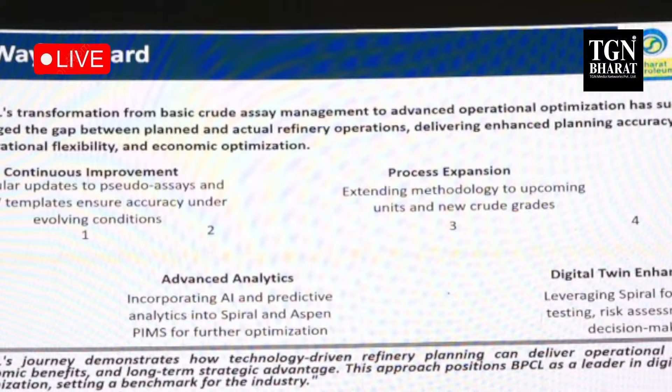Thank you, Shekhar. What a fine example of leveraging existing software tools which are available for modeling very complex real-time scenarios which we come across, and also for procurement efficiency by analyzing number of crudes very fast. So we are continuously challenged by these kind of scenarios, and it's a great example of how these things have been used. So thanks for that presentation.

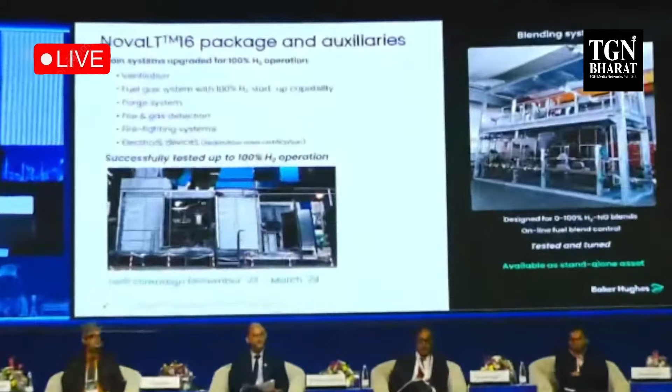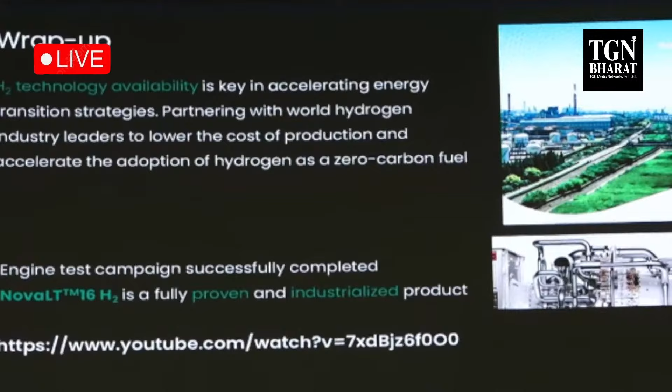So to wrap up on the Nova LT16, we know that hydrogen—we know how to burn hydrogen, or let's say we have the available technology to burn it. We are working with world leaders to produce this hydrogen at a lower cost and make it more friendly for the customers, even in terms of cost. And at the end, to achieve a zero carbon mission for the different customers, whether it is refining or petrochemicals.

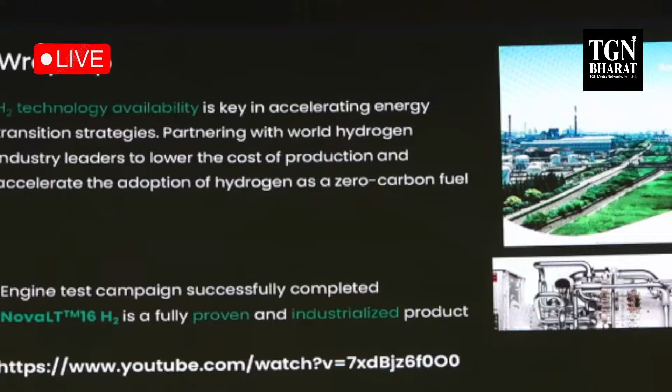We do have a short video. I don't know if we can play it, but I will quickly go through it.

We started the discussion with Nova LT16, and we do have another machine which is a heavy-duty gas turbine, able to produce up to 26.9 megawatts electrical. That's called Frame 5, and we have the solution operating up to 85% volume of hydrogen.

And in fact, we have a customer interest coming from Italy again to upgrade their existing gas turbine to run 100% hydrogen for Frame 5.

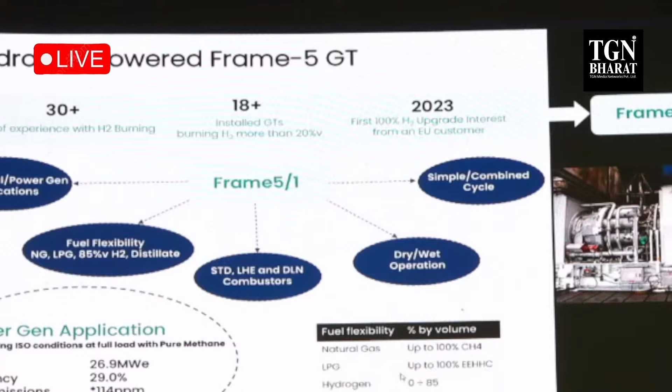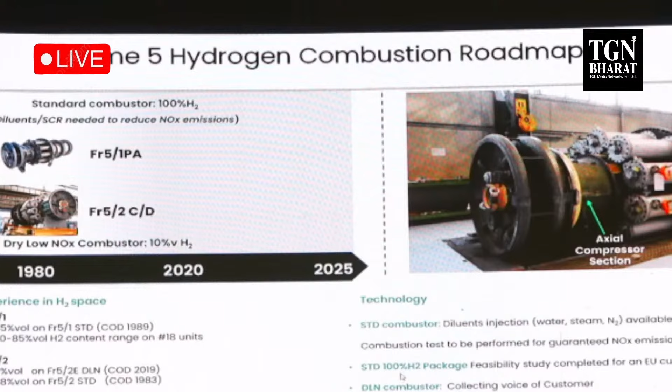These are the development phases. Back then, in 1980, we had the technology. We have been upgrading it for different applications and to burn more and more hydrogen. Now we are at a level of 85% volume of hydrogen. Similar challenges as we have seen for the Nova LT16 are applicable here, and also the different applications we see for these kinds of frames.

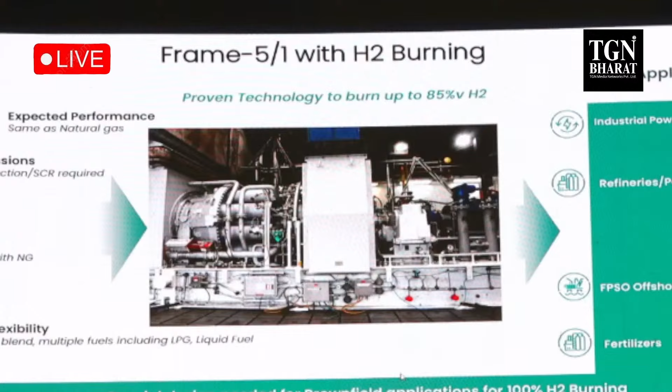At the end, we at Baker Hughes can help to achieve your decarbonization mission in the refineries or petrochemical industry. Please get in touch with us if you are interested in decarbonization of your plant. Thank you.

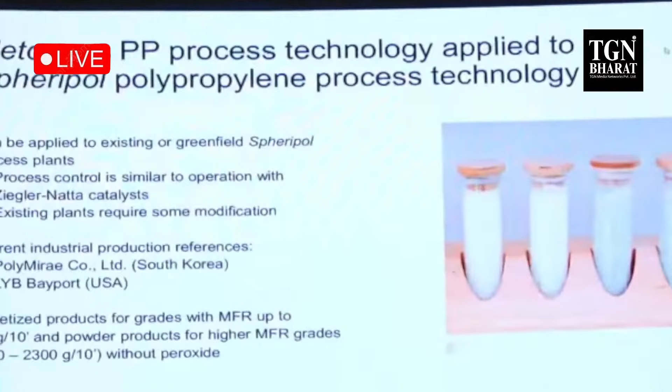Spheripol, I have already talked a lot about. The beauty of the Metocene catalyst is that, typically for melt-blown type grades, we can produce a product up to 2,300 MFR at the reactor. Normally industry produces those kinds of grades using peroxide, but the residual peroxide contaminates the polymer, and we lose that cleanliness of the product. By using this Metocene catalyst, we can produce up to 2,300 MFR, and the performance on your customer's line is perfect.

So then, if we are talking about textile lines like Reicofil 4, the performance of Metocene-based polypropylene product is fantastic.

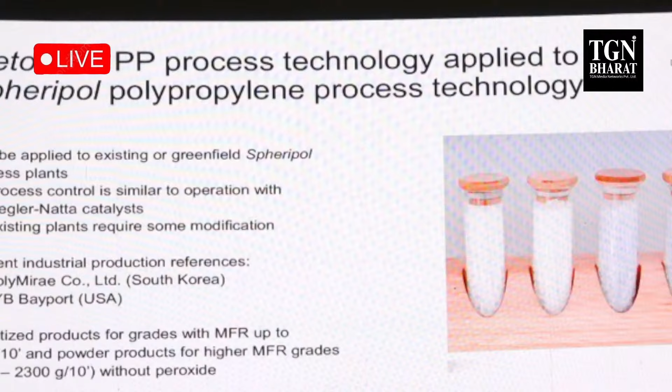This is the latest Spherizone PP technology, and in this technology we have a combination. Currently, industry is using only propylene and ethylene as comonomers, but here we can use multi-monomers. This gives the strength to this product that it can replace not only conventional PP, but also conventional other polymers.

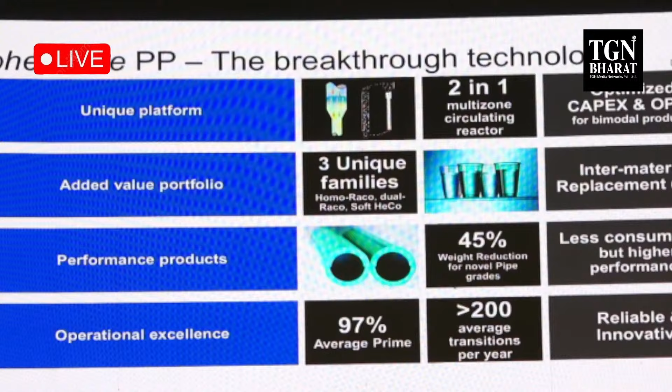So if we compare PP to PP, if a product is produced by any other technology, and we produce a similar product here, we can reduce the grammage of the polymer in the same application. Why are we able to do that? Because the process technology builds strength into the product in a way that it doesn't need as much polymer to give similar strength versus the existing polymer. The polymer is the same, but the beauty of the process technology is the kind of homogenization it brings.

If you see, there are two loops, one reactor, one loop. On one side, the riser side, one type of reaction is taking place, but on the downer side, another type of reaction is taking place. So it will look like one reactor to you, but with the switch of a button, this reactor gets divided into two reactors, and that is the beauty. That gives the process advantage to develop a product which performs better, and that's why we need a lower grammage of the product.

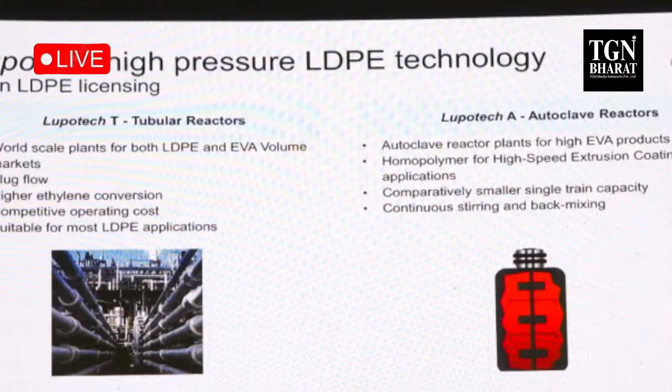The next one is for LDPE, and for LDPE we have both types of technologies, the autoclave one and the tubular technology. The third one is for Hostalen. We have a few plants in India, but the beauty comes from the 3-reactor ACP technology.

Normally, there are typical trade-offs in properties. If we increase density, then some other property like ESCR reduces. But in ACP technology, we can increase both types of properties together, and that is the advantage. So a grade like PE100 pipe grade, used for water transportation, can be produced using this ACP technology.

So with this, the key message is that we are continuously developing and bringing new technologies and new catalysts for polymerization, and I'm always available for your help. Thank you very much.

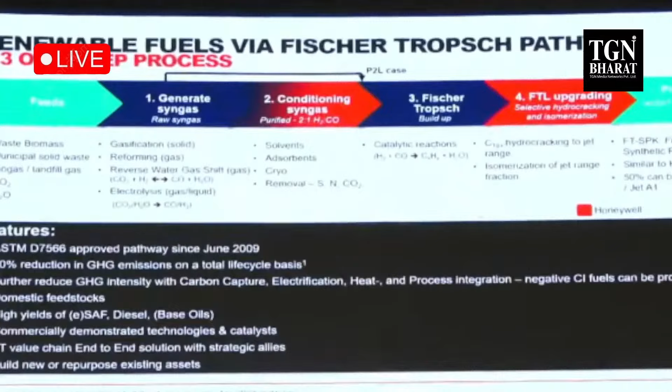Now I will take you a bit deeper into the Fischer-Tropsch pathway. This is how an overall complex of a Fischer-Tropsch pathway would look like. Be it any feed - waste biomass, municipal solid waste, biogas, landfill gas, or CO2 - the first and foremost step is to convert this into a synthesis gas. So generating syngas is the first step. Depending upon the feed we are processing, the quantity of contaminants in this syngas varies, and hence this needs further treatment to remove those contaminants.

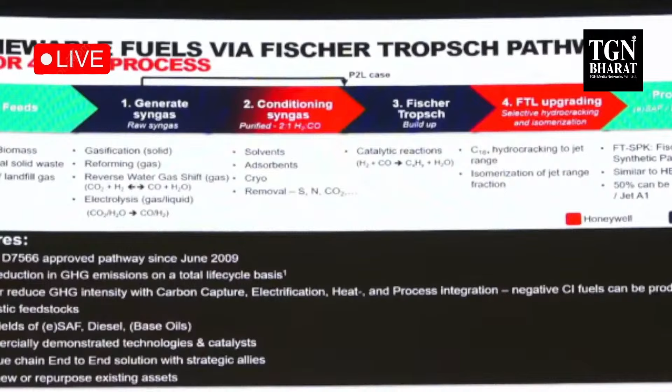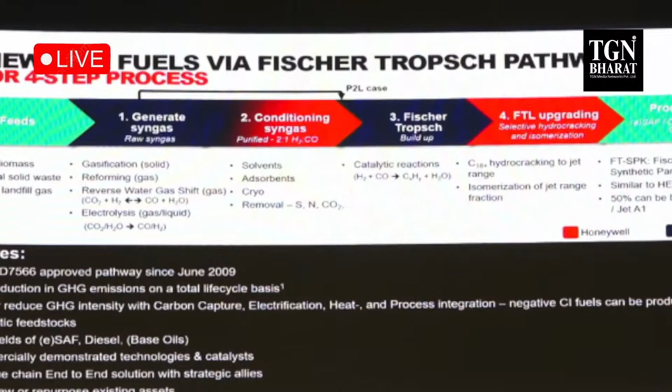Once the syngas is conditioned, we pass this through a Fischer-Tropsch building block, which converts this syngas material into a Fischer-Tropsch crude. Ultimately this FT crude has to be cracked back to put all the molecules in the right space, which is less than C18 range molecules, to meet the ultimate SAF product requirement. Another major advantage of this process is it gives flexibility either to operate the unit in SAF mode, or if there is a need, do diesel production, and if there is a need, we can also do base oil production.

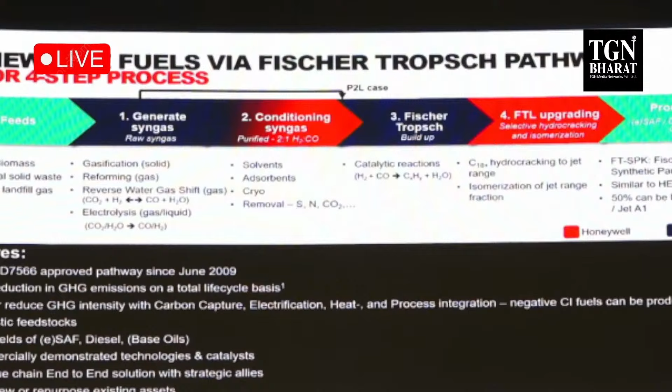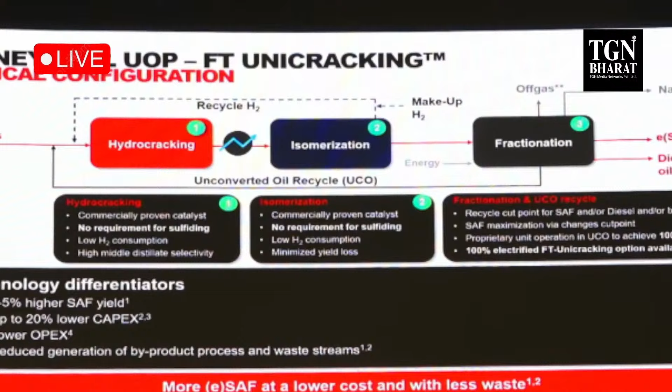So this is a very high level overview on the SAF pathway. From there, moving into UOP's particular offering - UOP has FT unicracking technology, which takes in feed from the Fischer-Tropsch process, which is nothing but the FT liquids and waxes. This material would need to be cracked, as I said, to less than C18 range material.

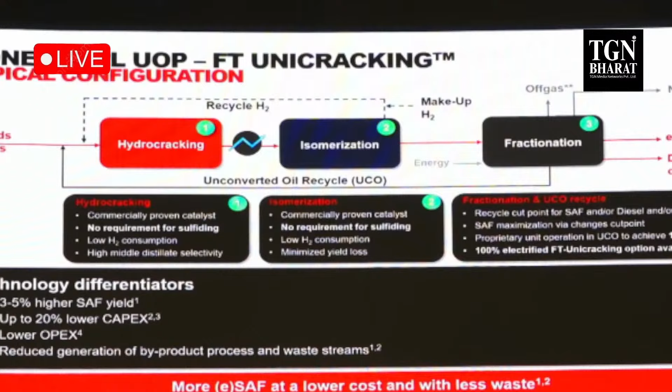The unfortunate problem, and which presents a bigger opportunity, is this: the FT material is highly paraffinic, and once we crack it, yes, it's very good material to meet the ATF range, but the problem is this will not meet the freeze point requirement. Hence we need to go for the isomerization step. So together with hydrocracking and isomerization, we would ultimately meet the SAF product specification as per ASTM D7566.

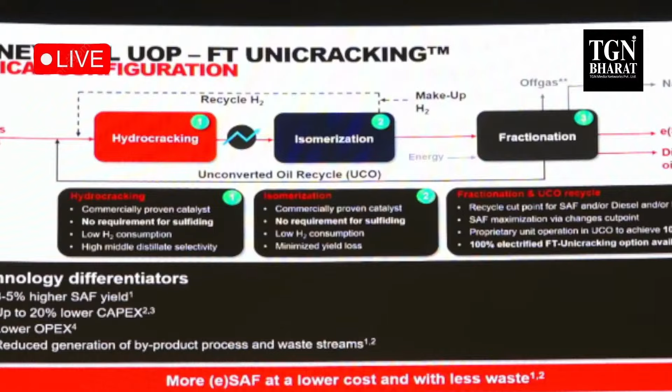Like any other cracking process, this would also generate byproducts - off gases and naphtha. If there is an offtake, well and good, so this can be sold in the market, but primarily we would aim to reduce this byproduct material. In the eventual scenario where we're left with some amount of this byproduct material, that is where we talk about carbon efficiency. The moment this naphtha and off gases are let out of the process, that much amount of carbon is lost, not in the form of SAF. So the carbon efficiency of the process is going to be less.

So during this scenario, we would try to integrate all this byproduct carbon material back through a recycle reforming and generate more syngas. Ultimately, if you look at a SAF complex, with all different feed materials that we start with, we will ultimately make just one product, which is SAF, going out of the unit. This means eventually my overall process carbon efficiency is going to be very high, in the order of 90 to 95%. So that is one of the biggest assets and advantages of this particular pathway.

Having talked about the technology itself, yes, everybody in this hall will know that these are technologies which have been in the chemical engineering domain for many, many years. However, the systems, the market, and the industry has progressed far ahead. These are not just paper technologies.

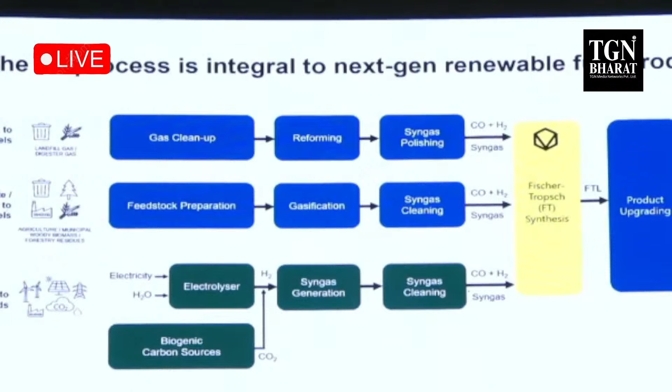I want to highlight where Fischer-Tropsch fits into the production of SAF. On this slide you can see three main pathways. At the top we have biogas to fuels: you take a sustainably generated biogas, for example landfill gas, which is cleaned up and reformed into synthesis gas, a combination of CO and H2, which needs to be conditioned to meet a roughly 2-to-1 ratio of hydrogen to CO for the Fischer-Tropsch synthesis path. The synthesis gas is then reformed into Fischer-Tropsch liquids, which are upgraded to SAF by cracking and isomerization.

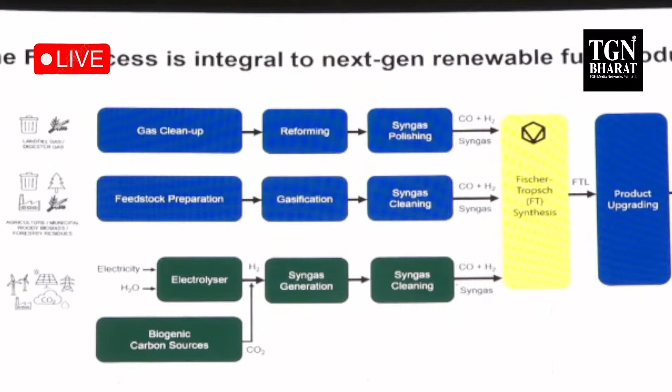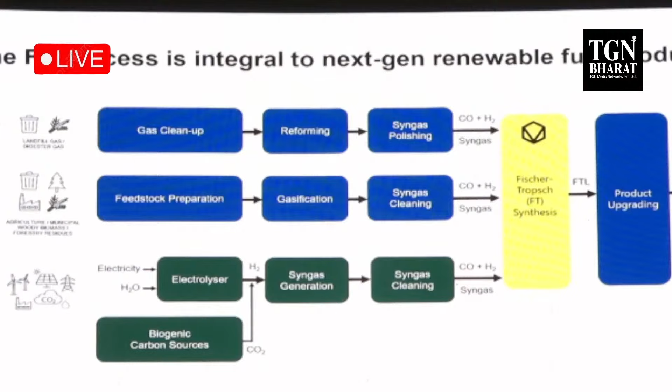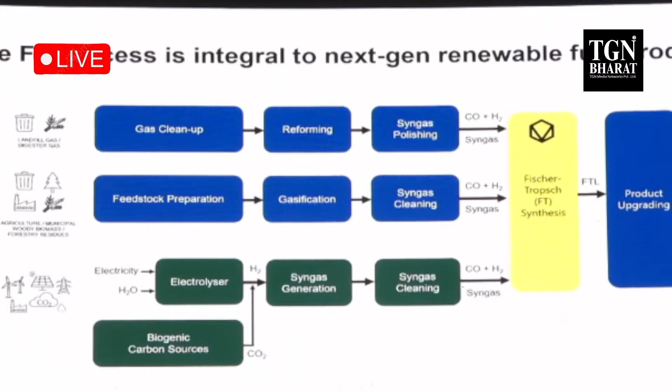Second, we have the solid waste pathway. Here you take solid waste, which is gasified at high temperatures to produce syngas. This requires some cleanup to get it on spec, such as removal of contaminants and adjustment of the hydrogen to CO ratio, leading into the same downstream processing through FT synthesis and product upgrading.

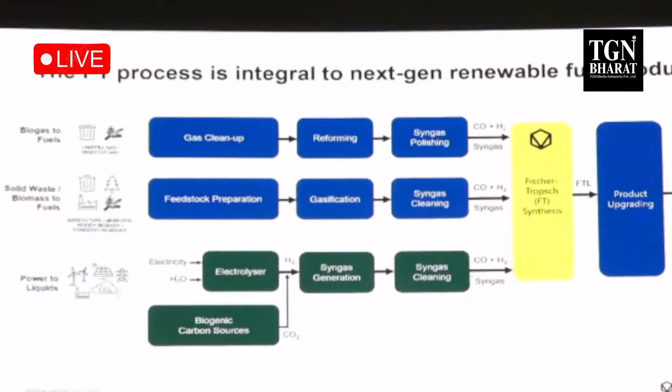Finally, you have PTL. PTL uses green electrons to produce hydrogen from the electrolysis of water. This is combined with CO formed from the conversion of CO2 from biogenic sources into CO, which is then generated into Fischer-Tropsch liquids through the Fischer-Tropsch synthesis process.

So another advantage of FT is that it's already a proven... sorry, my screen's updating here, but that one's not.

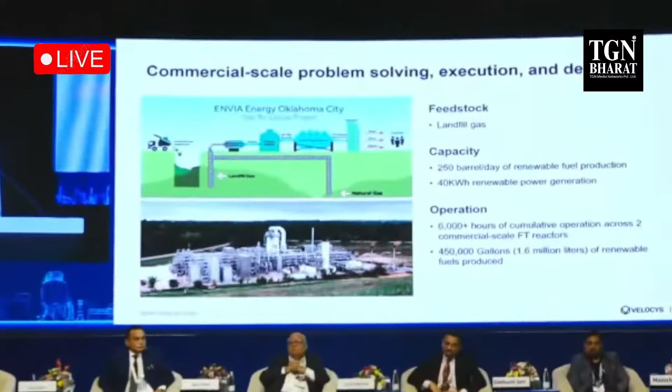And finally, we were able to demonstrate our technology on commercial scale at the ENVIA Energy Oklahoma plant, which was a landfill gas to fuels plant that utilized 2 of Velocys' commercial reactors, producing 250 barrels per day of renewable fuel production and 6,000+ hours of cumulative operation across 2 commercial scale reactors.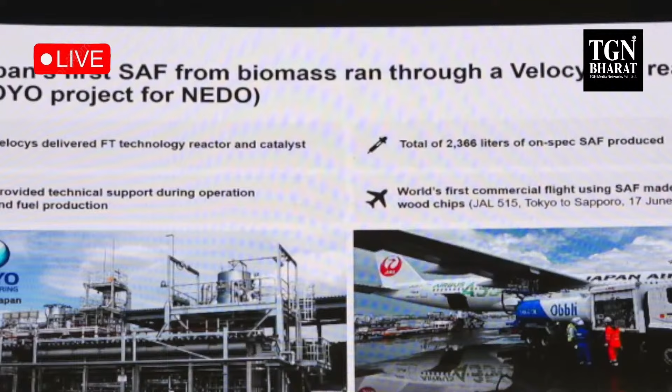We were also involved in a demonstration in coordination with Toyo and NEDO in Japan, in which our fuel generated from our unit formed part of the first commercial flight using SAF from wood chips in 2021 between Tokyo and Sapporo.

The microchannel reactor scales up using a proven strategy. From the lab through to the pilot and the commercial, we use the same dimensions. This means that the results gained during our lab testing and through the demos are very representative for the commercial scale, and it scales up in a linear and predictable fashion, reducing risk.

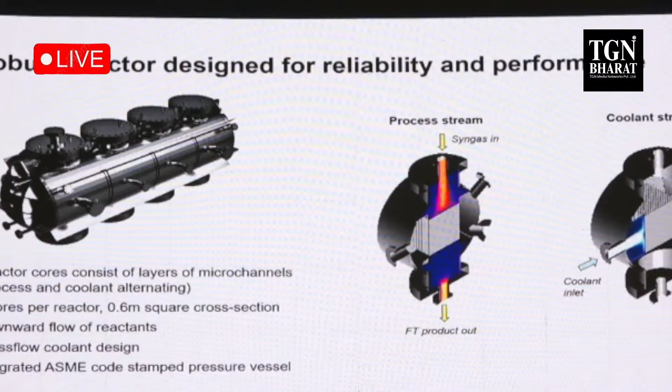What you can see here is our commercial size reactor. It's formed by 4 cores of alternating process and cooling channels. In the process channel, we have our catalyst packed in there where syngas flows down and FT liquids flow out the bottom. This is cooled by microchannels where boiler feed water is fed through and partially vaporized to remove the heat. This intimate design allows us to reduce hotspots and improve the selectivity and control of our reactor and manage the superactive catalyst.

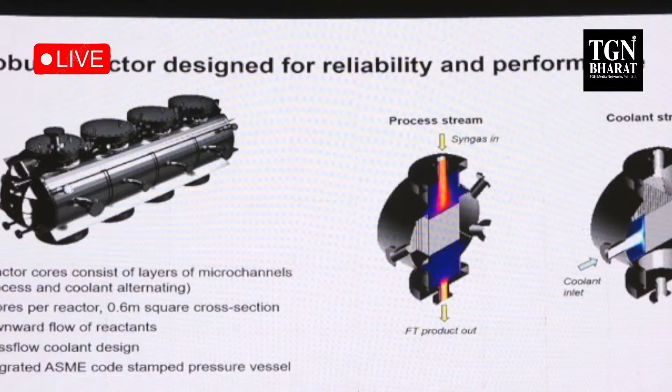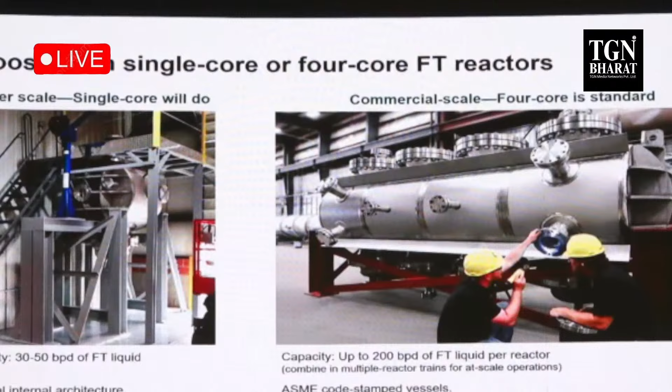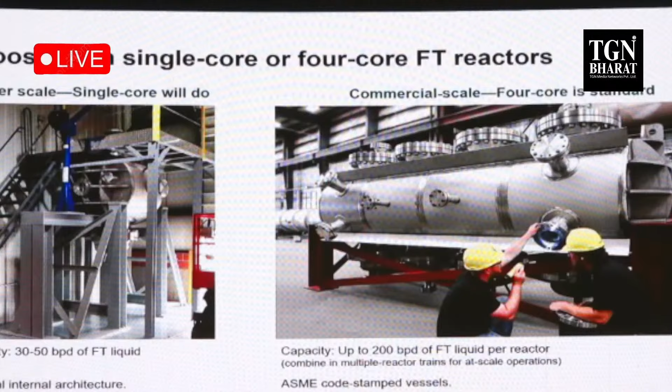Velocys offers a flexible solution. We have smaller single core reactors suitable for 30 to 50 barrels per day of FT liquid production, and then we have a larger 4-core commercial reactor for capacities up to 200 barrels per day. This is then combined together in trains to scale up and to scale down to any of our customers' needs for their desired projects.

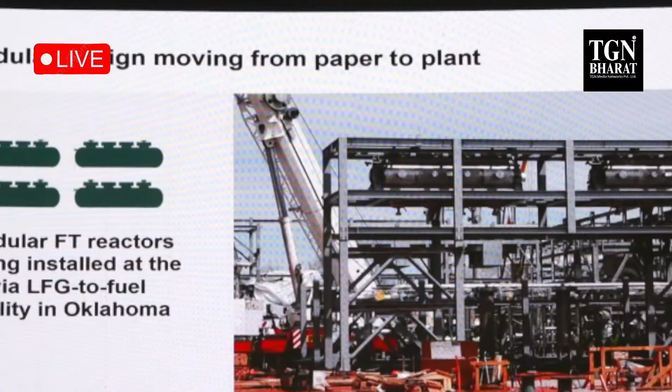Here we have our reactors being installed at the Envia location. As you can see, they're very small, very compact, easy to transport and easy to install. This enables us to deliver our reactors in a distributed manner where the source of syngas is, to provide FT liquids where it's needed.

Velocys' FT licensing model is taking off. Recently, we've announced our license being selected as preferred FT licenser for the Syzygy project in Uruguay, which is converting dairy-derived biogas into SAF via Syzygy's proprietary reforming technology. Additionally, we're partnering with NextChem and their advanced gasification process for the waste to fuels project in Immingham, Altalto in the UK.

We're also continuing our relationship with NEDO and Toyo to continue the advancement of SAF projects in Japan, and we have a strategic partnership with Sekisui, an advanced CO2 to CO technology to produce highly efficient power to liquids.

Post-HEFA, FT is your highest TRL commercially proven pathway to SAF, and Velocys is at the forefront of this. We've demonstrated our unit across the world with thousands of hours of commercial demonstration, piloted and lab testing. Velocys is ready today to help India meet its SAF demand through second generation technology licensing, FT reactor supply, and catalyst supply. Thank you.

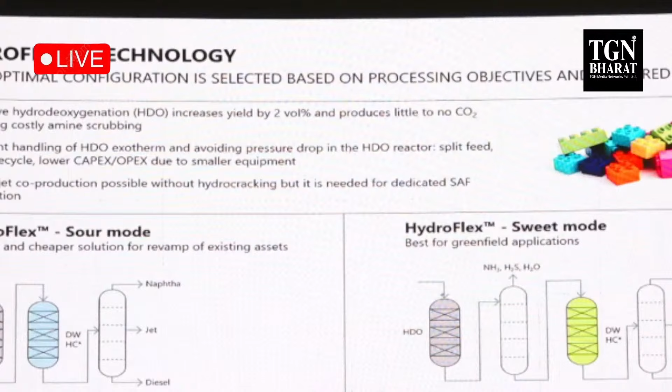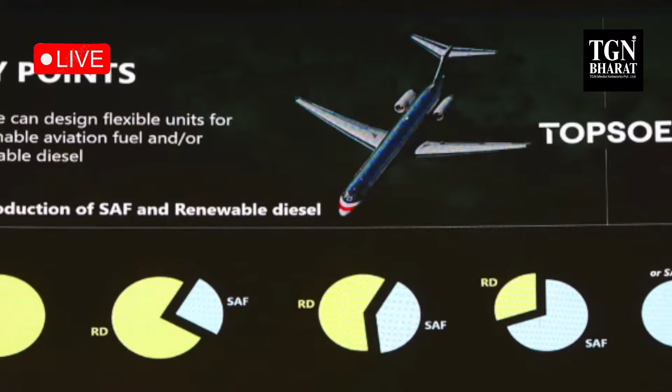The takeaway is with Topsoe technology, you have the full flexibility whether you want to go into 100% renewable diesel mode or 100% SAF mode, or anything in between. Topsoe has the solution for you.

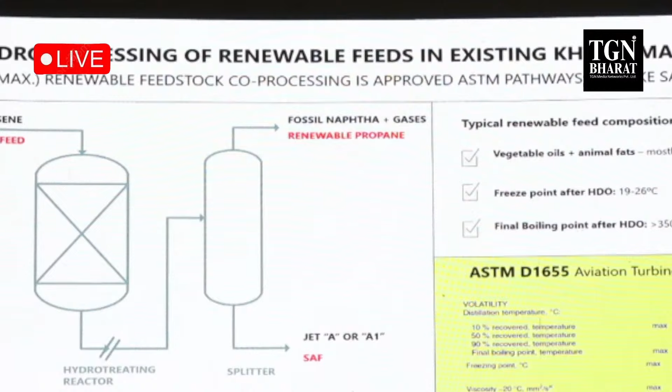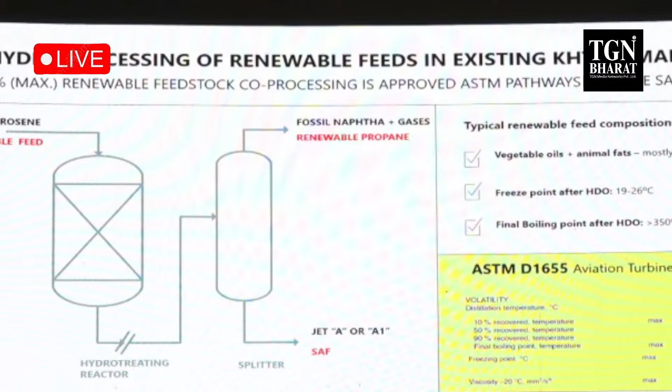A quick look into co-processing. So you want to use the existing fossil unit - we do have something known as co-processing. It's an ASTM certified method. 5 volume percent renewable feed can be used along with 95% fossil feed to get SAF. This is also certified under D1655, same as ATF.

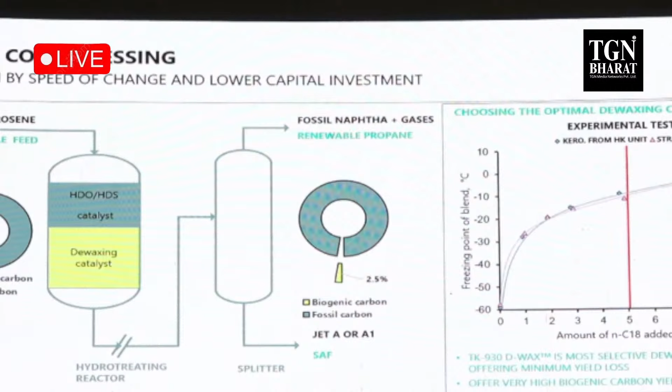What we try to do is a catalyst reload in the existing reactor. So the top has HDO, HDS catalyst, and the bottom has dewaxing catalyst. We are glad to inform that IOCL has shortlisted us for the co-processing method in its Panipat unit.

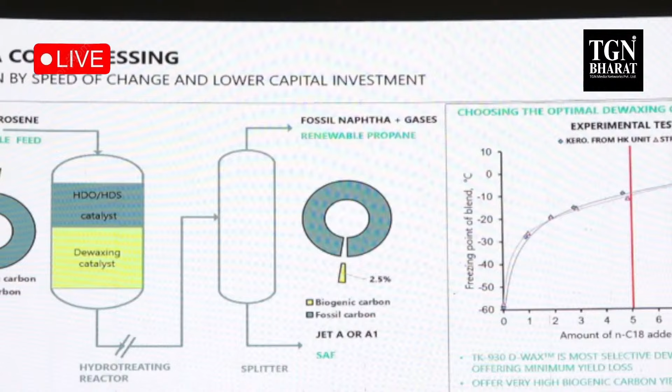I'll now invite Raju on stage to cover G2L.

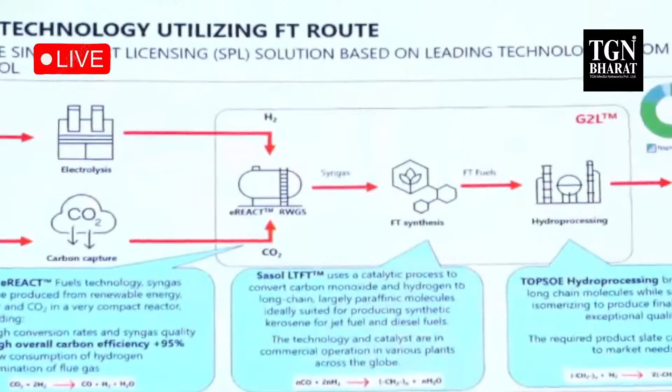And here we try to maximize the yield of SAF in terms of FT-wax. Then this FT-wax goes to the hydrocracking, which is a conventional hydrocracking. Here we crack the molecule and make SAF molecules, and we can get as high as 82% SAF by this process.

Going forward, I just want to highlight that it's very important that we utilize an innovative technology module to integrate this solution. In this particular slide, you can see the undesired products, which are gas, naphtha, and light ends. From the hydroprocessing unit, these can go back to the reverse water gas shift, or E-react, and then make more syngas. So this means we are fully utilizing this process, increasing the process efficiency.

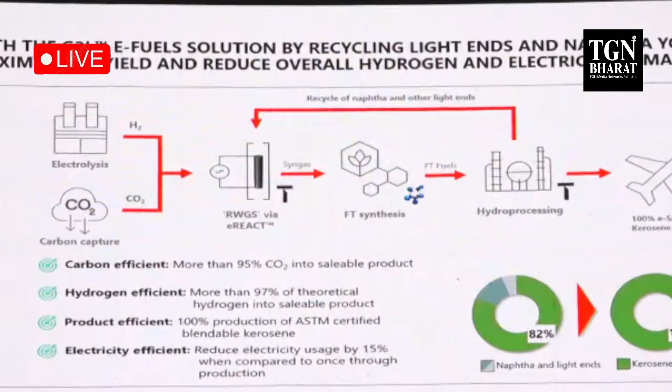And you can see this way we can increase the carbon efficiency by more than 95%, hydrogen efficiency so that we can use more than 97% of the theoretical hydrogen. Product efficiency - this product is ASTM certified. Electricity efficiency - electricity use is actually reduced by 15%. And you can see here the yield of SAF can be 100%. So I think that is a unique part.

Further going forward, I wish to mention that we have a SOEC, solid oxide electrolysis cell. This is Topsoe's high temperature electrolyzer, which is much more efficient compared to the alkaline and PEM electrolyzer. So if we integrate this particular block into the process, it can further enhance the efficiency of the system. On the right-hand side bottom, you can see the further electricity consumption reduced by 33%. So I think it's again reducing the levelized cost of hydrogen.

And I'm happy to announce that we are going to inaugurate this factory of SOEC by tomorrow, which is 500 megawatt capacity in Denmark.

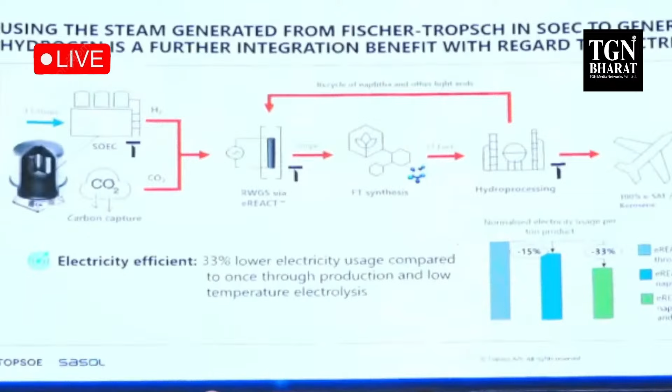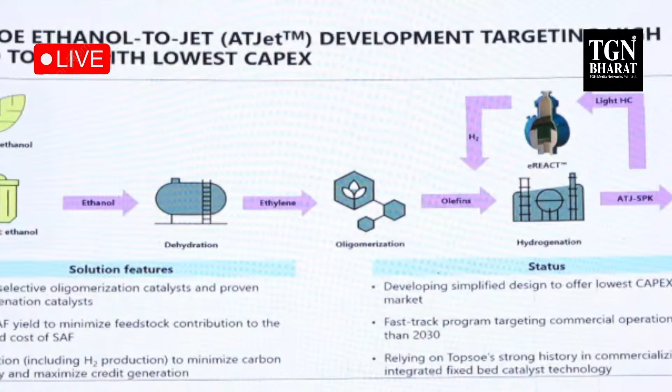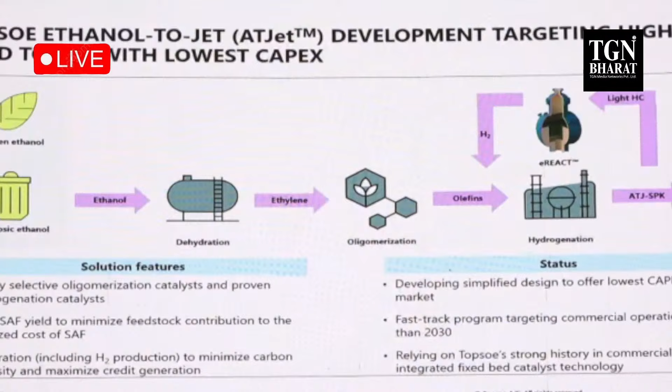Coming to the ATJ route, we are happy to announce that we are in an advanced stage of development. The goal of this particular process is to maximize the SAF, meaning more than 90% SAF from this process with minimum capex. In this process, we have dehydration, oligomerization, followed by hydrogenation. We bank upon our selective oligomerization catalyst and proven hydrogenation catalyst, and we try to maximize the SAF yield while reducing the cost of production of SAF. That is a key goal.

You can again see on the right-hand side that we are able to integrate e-react and make hydrogen, meaning you can recycle the undesired product to make hydrogen and make this process much more efficient. We are quite enthusiastic about it, and our plan is that by end of this year we are going to complete the process, and we may talk to the client. We are already talking to clients globally for this particular process.

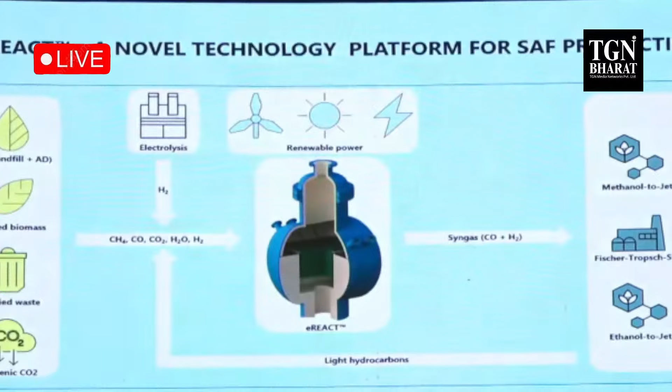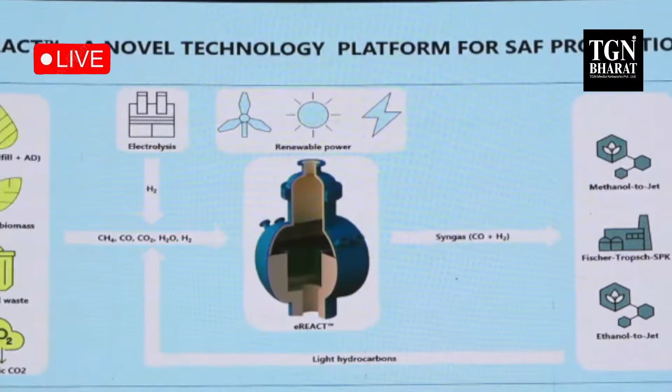A little bit about the e-react. I think this is a module - we call it a novel technology because it is an electrified reformer. It replaces the conventional reformer, and it can take methane, CO, CO2, hydrogen, and make syngas, which is sent to the Fischer-Tropsch process. Similarly, for ethanol to jet, we'll be using light hydrocarbon feeding to the e-react, and this e-react will send hydrogen to the process, making it more efficient.

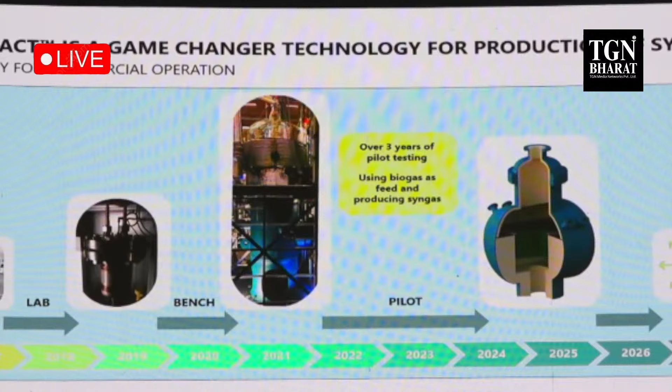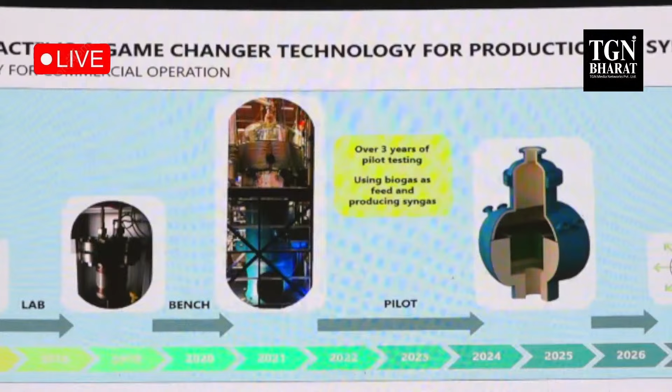As far as commercial experience is concerned, this plant has already been running for more than 3 years now in Foulum, Denmark, and has been operated on biogas, making syngas. So it is ready for commercial operation. We have already sold a license to 3-4 clients worldwide, and we are very excited that this particular module is going to be a game changer technology in energy transition.

Coming to the FT route, as I said, we have a technology partner, Sasol, who has decades of experience in Fischer-Tropsch technology. Topsoe and Sasol have worked together for decades, and we have many plants running. So this is again a commercially proven step, and we are ready for implementing our commercial projects.

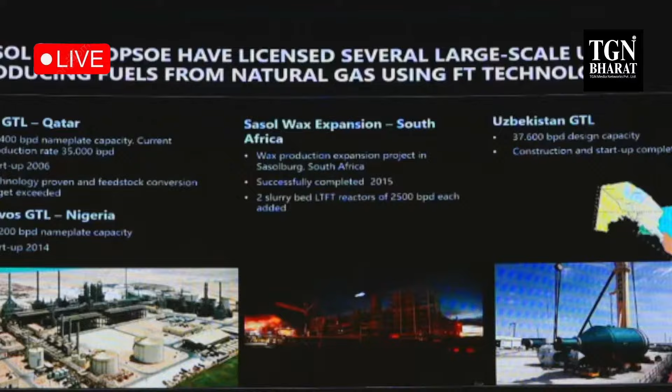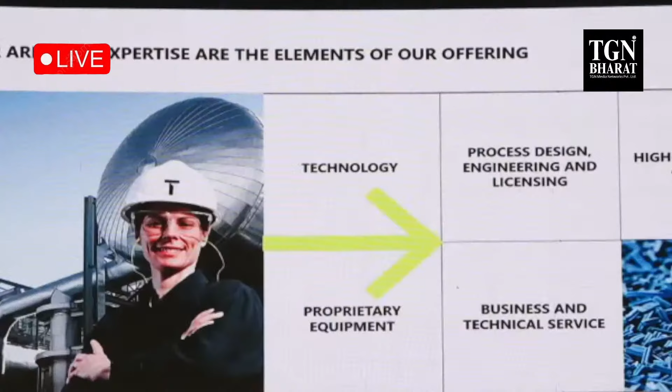Now maybe the last few slides. Overall, as Topsoe, we can offer this technology as a single point responsibility because we have technology, license, high performance catalyst, equipment, and technical service. If I look at the overall picture, what are the things which make the project viable? You need a technology which is well proven, a licensor who can supply this technology as a single point responsibility. You need logistics, project financing, regulation, offtake agreement, and of course the feedstock. And I want to finish my talk with a very short video, which I am going to play.

Somebody in Topsoe saw a puzzle within our data and said, you better keep an eye on this. You might have trouble down the road.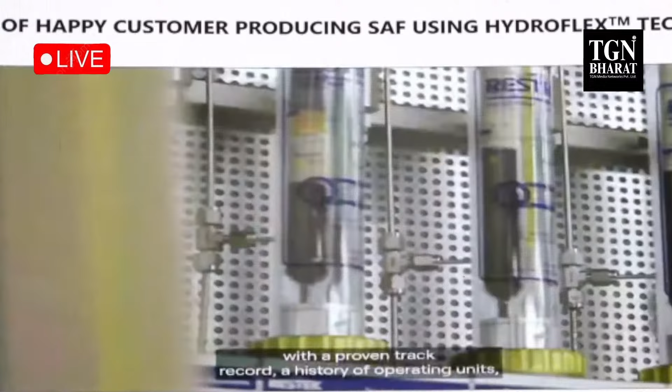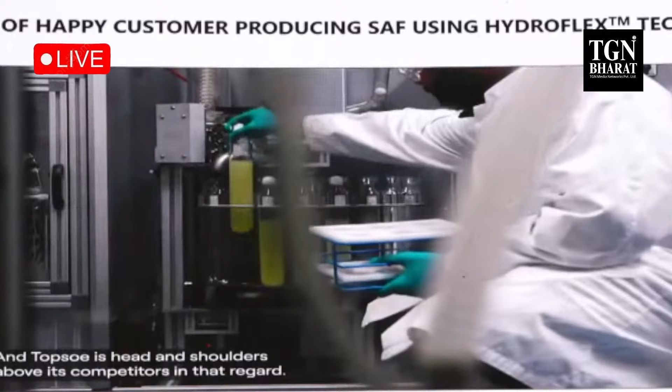That's unparalleled. My name's Bruce Fleming. I am the CEO of Montana Renewables. We are the largest SAF producer in the Western Hemisphere. I never get tired of saying that. But we're only producing 30 million gallons per year. We're going to increase that dramatically. We think we will be at 300 million gallons per year of SAF about two years from now. That is 10% of the U.S. Grand SAF Challenge that the White House put out last year. This is a mic drop moment. Little Calumet in Great Falls, Montana, 10% in two years' time. The way that happened was we started off with a 24,000 barrel a day cat feed hydrotreater. But here's the kicker, we had no way to fill that. So in a very classical study where we said, what can we do with all of this idle capability? We ran into renewable fuel. We'll switch the feedstock to renewable feedstock and rearrange the rest of the refinery accordingly, and that's what we did. So start to finish was 18 months. Most people take 18 months to do the initial study before they actually do any of the work. That's simply signaling what's possible. We systematically and methodically removed every risk component that we could identify and point to. Chief among those was, does the technology work? And the best way to solve that is to select a technology provider with a proven track record, a history of operating units, if not directly relevant, at least immediately transferable. And Topsoe is head and shoulders above its competitors in that regard. The Topsoe HydroFlex catalyst offering was installed in our existing hydrotreater unit. That was a very easy conversion for us. The catalyst works exactly as advertised or better, and we've been very, very pleased with the performance.

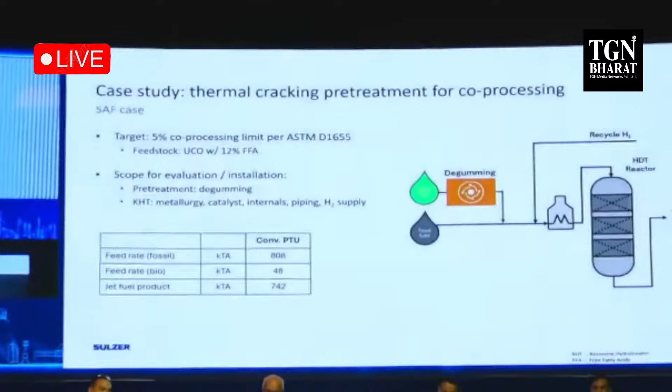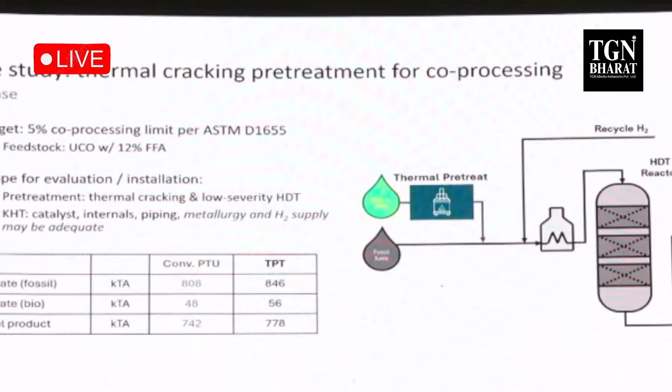Now, without adding any extra capacity, without worrying about the hydrodynamics or anything else, the modified pretreatment approach—the thermal pretreatment followed by mild hydrotreating—allows us to process a little bit more feed and make a lot more product using the same refinery, using the same setup we already have. And whatever applies for the SAF case also works for the diesel case. That goes without saying, and that's something for us to keep in mind.

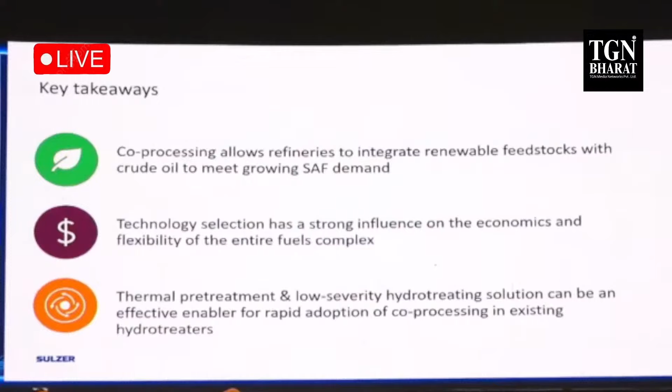So with that, a couple of takeaways from the process: co-processing is a solution that refineries want to look at, so that we can actually get to those 1%, 3%, 5% numbers in a short range, allowing us to meet the goals that governments expect out of us, that the world expects out of us. And of course, technology selection has a strong influence on the economics and flexibility we need for the fuels complex. By that, I mean—can I get to a cheaper feedstock? Can I maximize my profits while still doing what is right for the world? I think that's the answer we are looking for.

And what I hopefully presented to you is that this thermal pretreatment followed by a low severity hydrotreating step is an effective enabler to get us to a place where we can start to rapidly adopt co-processing in our existing hydrotreaters, get to the initial targets first, and then move on to the more complex challenges of how we get to final net zero answers. So with that, thank you so much for your time and attention, and we'll look forward to your questions or discussions later on once the session is done. Thank you again.

Thank you, Soumitra. That was a very novel presentation on a very critical step in SAF processing, which decides so many things for the technology going forward. Thank you so much. So now I invite Dr. Palak Dugar from Visolis to introduce us with a new molecule unheard of in biorefining.

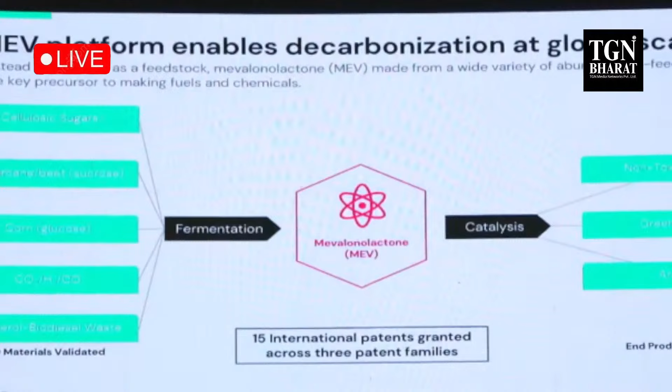Visolis's MEV platform, which is short for mevalonolactone, enables dozens of high-performance applications. MEV is made via fermentation using an ethanol yeast, which is programmed to hyperproduce MEV. This is followed by a thermochemical catalytic upgrading of MEV to produce advanced biofuels and chemicals. This pathway is feedstock agnostic and is capable of utilizing feedstocks such as molasses, damaged food grains, as well as 2G feedstocks such as municipal solid waste, agricultural residue, and 3G feedstocks like waste gases. This technology has been specifically demonstrated for the raw materials shown on the screen.

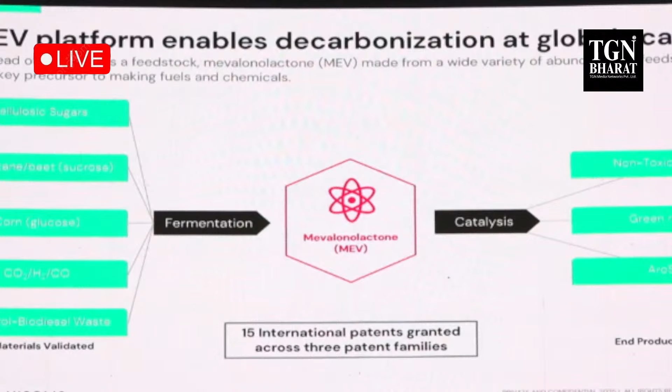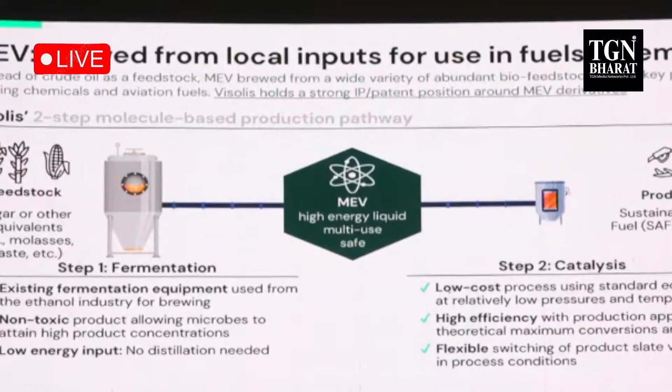At a pilot scale, Visolis's patented technology and production pathway for MEV is the precursor to making high purity energy dense fuels and chemicals, offering capex savings as well, since the existing standard equipment from the ethanol industry can be used for brewing. Additionally, MEV is a flexible intermediate, as one can switch from different products just by adjusting the process conditions, giving us both versatility and scalability.

MEV is a liquid with 40% higher density than crude oil, and just like crude oil, it can be shipped globally and can be used to make high volume products. But unlike crude oil, MEV is non-toxic, bio-based, and biodegradable. Out of the dozen end products today, I will focus on SAF, which has the largest immediate opportunity.

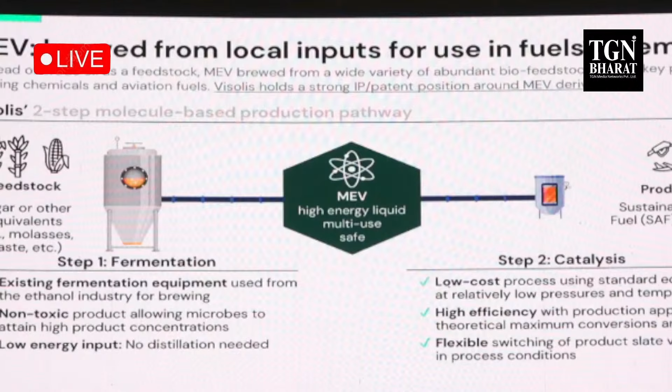So SAF, sustainable aviation fuel—SAF is aviation fuel. It, also called Jet A, is composed of three main types of molecules: linear, cyclic, and aromatics. All of the SAF produced today and sold in the market consists of only linear molecules. In order to meet ASTM specifications and be compatible with existing infrastructure and airplanes, such SAF has to be blended with Petro Jet A and is limited to a 50% maximum blending according to the ASTM requirements.

Visolis's technology exclusively makes the other molecules, the aromatics and the cyclics, which together we call AroSAF. This AroSAF has many key advantages in terms of improved properties, as well as it's expected to be more cleaner burning due to the absence of polycycloaromatics. This AroSAF can be blended with other linear SAF to create a 100% drop-in replacement for Jet A.

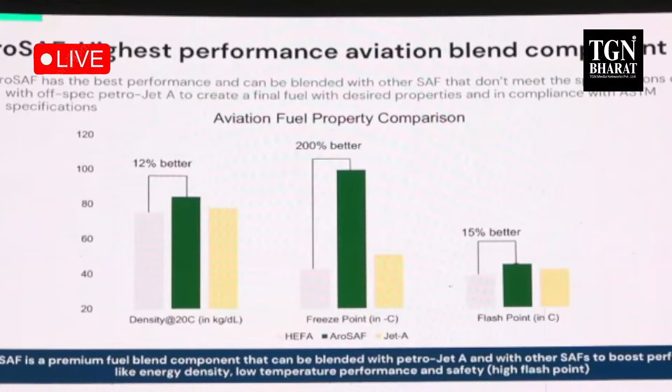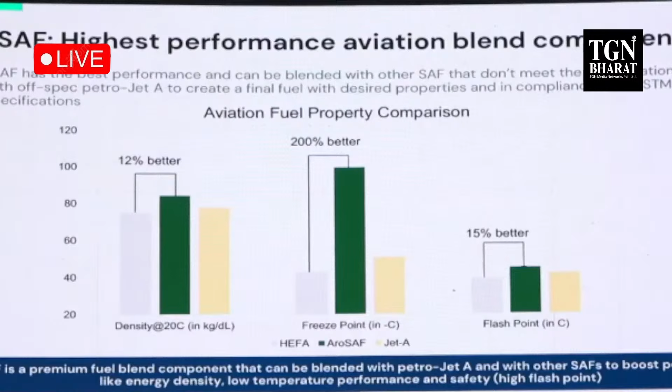Talking about the properties, AroSAF is better on multiple fronts. It is 12% more dense than HEFA-SAF and Jet A too. It has better cold flow properties due to a lower freeze point. At the same time, it also has a higher flash point, making it safer to handle. Such premium properties can be harnessed via synergistic blending with other SAF as well as Jet A.

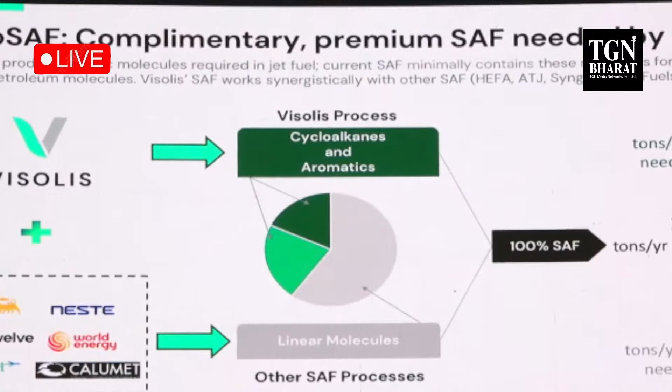So AroSAF basically forms a very critical component of 100% SAF. While the majority is working to make linear molecules for SAF, Visolis is exclusively producing AroSAF. With this premium offering, we're already working with marquee customers like the US Department of Defense. And as we scale production, the world moves towards 100% SAF beyond 2050, we need at least 50 million tons of AroSAF, which will be needed to blend alongside 100 million tons of linear SAF. In total, AroSAF represents a third of the jet fuel demand globally, which is about 150 million tons.

Lastly, I would like to touch upon the overall impact potential of Visolis' platform from the perspective of greenhouse gas emissions. With 1G feedstock like grains, our product produces over 70% reduction in greenhouse emissions relative to Petrojet A. With 2G inputs like agri-residues, there's an opportunity to go carbon negative on a life cycle basis due to two main factors. First, the feedstock-related emissions are minimal, and the feedstock represents renewable carbon that is fixed in the plant matter. Second, the rubber copolymer that's produced alongside the fuel inside our facility continues to hold on to the renewable carbon, sequestering it even at end of life since it's not burnt.